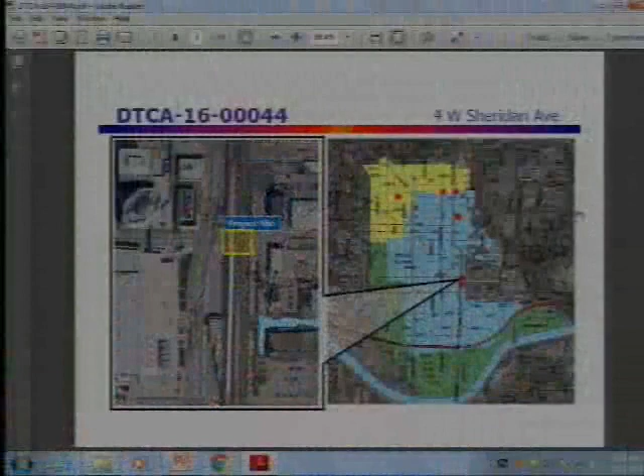We're real excited that we're now including another underpass for the mural project. You might recall the last one we did, on Reno—if you haven't driven that way since it's been finished, please do and enjoy it as you drive through. This is the next project that's come up, and this one is involving the Chickasaw Nation, so we're very excited the projects are expanding.

And we have Native American artists involved in this project. Once again, the underpass as you drive through there is white and very stark. In this particular case, when you get into Bricktown and flip around to look the other direction, there are some old murals up, as you can see in the picture. So this is really going to step up the game and introduce a whole other level of artistic endeavor in that location.

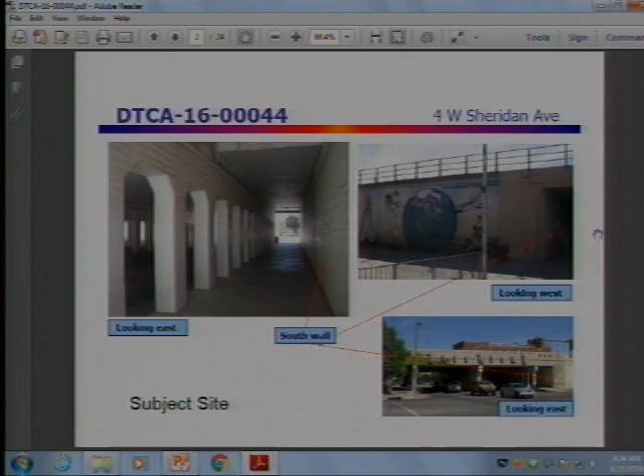On the one side you've got Bricktown, and on the other side you have the downtown area. As I said, one of the projects is the north wall, and one is the south wall. In addition to those walls, it's also all of the columns in front of them—so if you're looking toward the north wall, you'll see the columns that will also be included with that project.

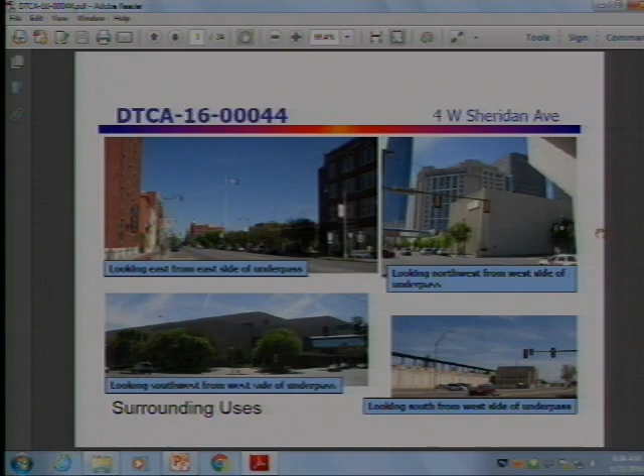So let me flip to... and I know I won't pronounce names correctly, so I'm probably going to let you guys pronounce your names because I do not want to botch them up. So the first design team is Chad and Rhianna—okay good, I did that one correctly. And that one is going on the north wall.

The scale is kind of hard to see. I have my own nickname for this one, which to me is the feathers and the angel people, but that's just how I looked at it—we'll let the artist talk about that. But this was in your packet, showing how it's going on the north wall.

So why don't you all pick up from there, because I don't need to read all of your description—it'll sound better coming from you. Hi, I'm Chad Earls. I'm a member of the Caddo Nation of Oklahoma, and I live at 11105 Spring Hollow Court. I was just going to read the statement I wrote about the piece called Earth and Sky. This would be a collaboration between me and Rhianna Deck, Choctaw Nation of Oklahoma, and we just wanted to make a piece that was fresh, new, and very bold for the city, and tie in with the land.

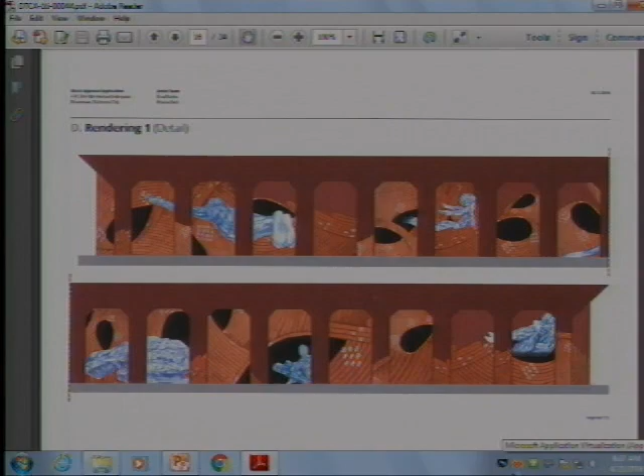The one thing I failed to say is that earlier this week the murals went to the Arts Commission. Thank you so much, it just flew out of my head. They recommended approval of the murals, as well as installation of an identifying marker, which is a new thing they're doing with mural projects. That was part of their recommendation at their meeting, which I think was Monday. You all had that meeting to go to.

Okay, great, anybody have any questions? These are two separate applications, so we need to vote on them. That's great, I think it's beautiful. I love the movement, and it's nice to hear your concept and see your artwork and visualize them together. I think it's really nice. Okay, anyone from the audience want to speak to this at all?

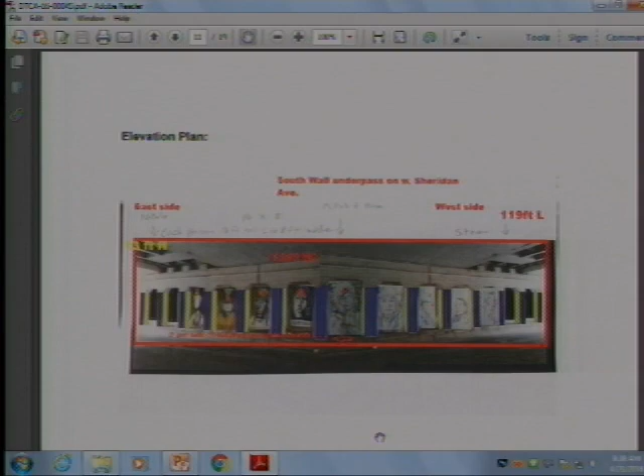Now we have the second application. Do you want them to just address it, or talk about this separately? I don't really need to repeat my original, let me get these larger so they can describe. We have the second design team here - that's you, Nicole? Yes. And this will be on the opposite side of that same underpass. I was fascinated because it's totally different, and I think it's going to work really well as you go through.

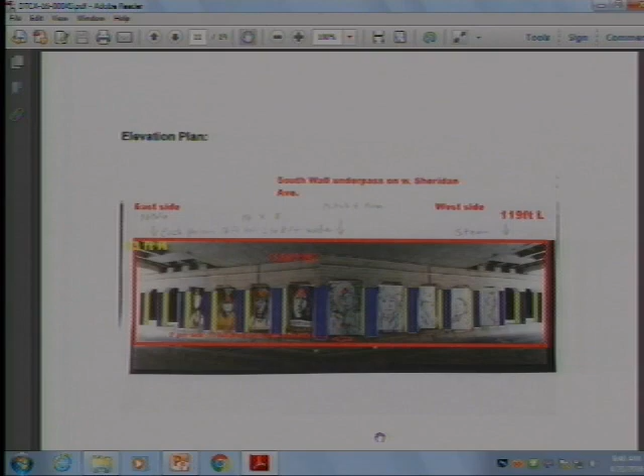Some of us have probably seen some of these pictures before, looking in a book or whatever, and just never made the connection with who it might be. I think that's one of the interesting aspects of this one - the people don't necessarily have names, some of them do, and I like the central collaboration they're doing in the middle, that they're both involved in. But I'll let them tell you about that. Hopefully this is the best view to look at, I'll get it a little bigger. I like the way it looks as you drive through, that each of the faces could be framed as you go through.

So if you guys wanted - my name's Stephen Grounds, I'm from the Navajo Nation and also Euchee Creek and Seminole. Basically for this mural, we decided to give it context with a poem by John Trudell called See the Woman.

We're going to do a collaborative mural in the sense that Nicole's going to reinterpret portraiture in her specific style, and it's all going to be on one side of the mural, and I'll be doing the same thing on the other side of the mural. Then we're going to work towards the middle piece, which would be a Chickasaw elder, and we're both going to do a true collaboration on that middle portrait. The portraits I'll be painting are based on photography from one of my friends in Oklahoma City who's taken photographs of current individuals from different tribes, and it will speak towards the modern day Native in today's society. Whereas Nicole's going to be painting Natives from the past, so the concept will be future generations.

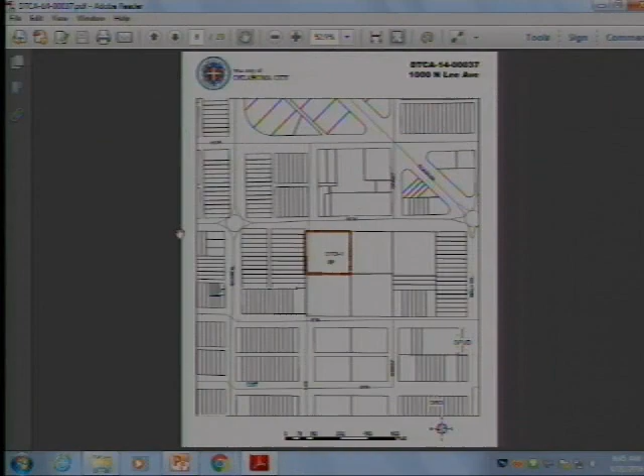The committee saw the new emergency room addition and the accompanying signage sometime in 2014, I think. But since then, they've gone through and changed the location of some signs. They've increased the size of some. There's been a lot of changes, so they're essentially redoing the sign package, and that's what is before you. They will need a variance to relieve the requirement of no signs in the right-of-way, the number of signs, the maximum display area, and the maximum sign height. Staff believes that all of these are appropriate because an emergency room is such a specific use in terms of signage, and understanding where it is, is very important.

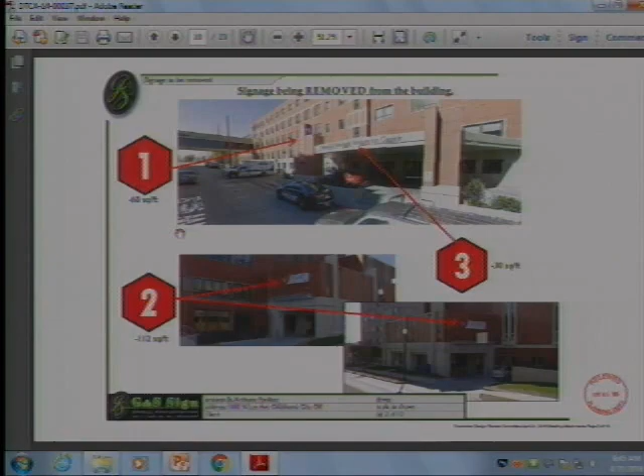Any other questions? I'm here for questions. If anyone has questions, in a real short version, the emergency room is going to move from one side of the block completely to another part of the campus. The buildings are tall. A lot of the signage that we're putting up, we're also taking down about the same square footage at other parts of the building. So it seems like we've got an increase in square footage, but we're also reducing the square footage in other areas. One sign has to be out in the right of way just because the hospital was concerned with somebody pulling into the ambulance entrance instead of the emergency entrance, and they were afraid they may get hung up for a brief period of time, which could be a few seconds, but could make a big difference when you're looking for emergency.

Okay. Any questions from the committee? Any comments from the audience? With that, do we have a motion?

I move to approve the application on the basis that the project complies with the regulations and guidelines of the Downtown Design District Zoning Ordinance as referenced in Section C and D of the staff report. Okay, so that's a Bates, Ainsworth motion. All in favor? Aye. Aye. Any opposed? That motion passes.

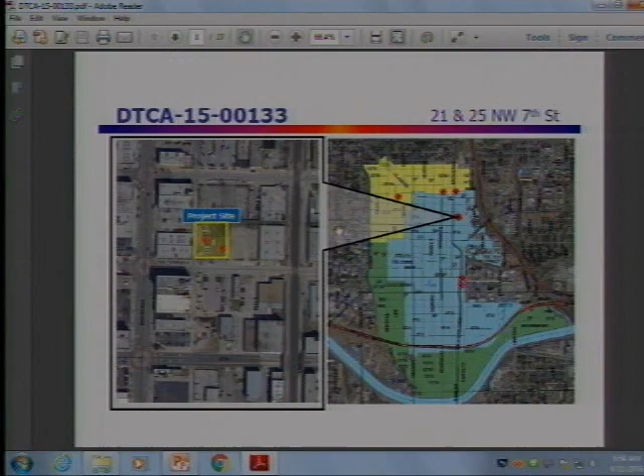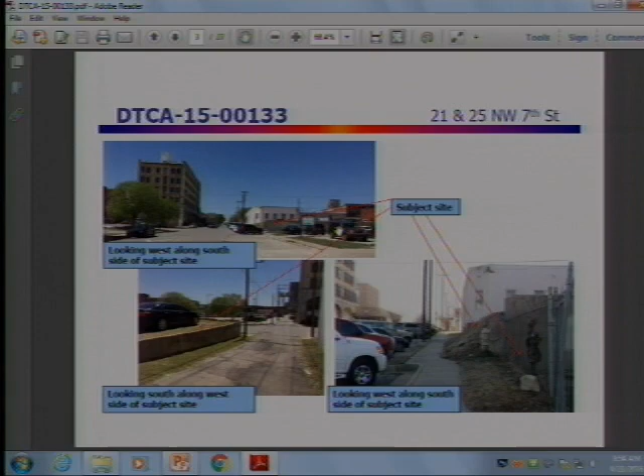Next item is item 6C, 21 and 25 Northwest 7th Street. Lots of things happening in that area, right? Yes, the committee saw a presentation on this project a couple of months ago. It's a food truck court and associated structures. The main comment at that presentation was whether the project could better address the street frontage in terms of window and door access, and the design in front of you now has addressed that issue in a much more significant way.

Can I ask a question? Is this under the purview of Automobile Alley? We send all Automobile Alley applications to a representative of the Automobile Alley Committee. The committee doesn't convene for every project. I just was wondering if this was heard by that committee. It was not heard by the committee. Okay.

Dave Ledbetter, 2612 Drake Stone. I'm here on behalf of the developer, Nick Faulkner. Does anyone have any questions?

Would you walk us through the elevations so that we can understand them completely? Because they are a little difficult. Starting with the rendering on the south, the entries on the southeast corner. Okay, enter the structure for that particular point. The entry to the actual first floor is in the entry module vestibule located directly inside that. And beyond that, there is a chairlift, and it says stairs that goes up to the main upper level, which is the same level as the majority of the alley.

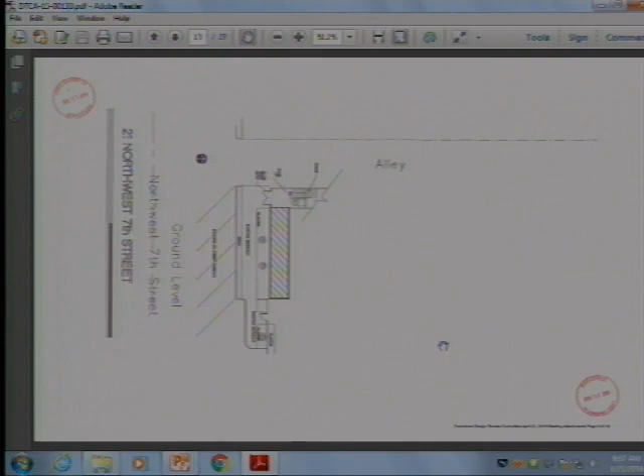Okay, so on level 1, on the floor plan, is that one of the pods, one of the shipping containers? Yes. And it will be used—because on the floor plan, it's hatched differently than the... let's see what we have here. Right, that's just to give the location of the actual space on level 1, correct. And it will be used? Correct. So to place that shipping container there, how are you installing that?

We're going to have to do substantial site work, engineering. We're going to have to excavate and build retaining walls to the back. Okay.

So in the same vein as Corey's question, what do you see inside those windows? I'm sorry? You've added the windows on the street? Correct. On the first level, basically you see into the space, it's wide open. And you said you were planning retail? That's our hope and intent, as a possibility, but we don't really know what we're particularly seeing yet.

So your plans actually show—maybe the plans are at a different level. Plans actually show windows across that entire frontage, except for kind of 2. The windows on the entire... so the windows on this plan are actually showing the second level? Correct.

And then the concrete retaining walls that are on both the east and west side of the site, are these the existing walls being maintained, or are these new walls? Our belief is we're probably going to have to replace those. We're securing engineering presently to find out what the existing structure can support. Okay, so most likely those existing walls are going to come down. Yes. But you're planning to build a wall exactly like what's there? Yes.

On the actual courtyard itself, where you're proposing this white picket fence, what were your thoughts on that? I noticed somewhere else you had the metal mesh fencing, but on that prominent facade, it looks like you've chosen to switch to a wood picket fence, and I just wanted to hear your thoughts on that. Oh, on the lower south elevation.

That was basically a cost factor.

How long do you think this is going to be used? Is it something you're proposing as temporary infill, or do you see it long-term? It would be nice for it to go forever. We have a 15-year lease on one piece of property. The other is a shorter term.

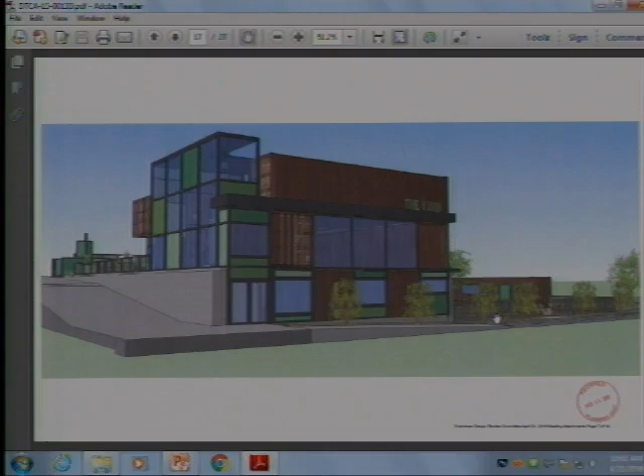My comment with the wood picket fence might just be about the durability of that fence in this particular location, and whether there's an alternative, similar product that might give a similar look but be more durable. The recent change in the design guidelines limits you to a type of fence - I think it's a 1-inch picket with 2.5 inch spacing - and basically it was just a cost factor.

I agree on the materiality of the fence. It seems somewhat out of context relative to the rest of the project. We'd be willing to substitute a metal rail picket fence if desired.

And do you have a location for the mechanical equipment? What's servicing this building, and where is that located? Third floor, the center module.

Go up, keep going to the left. Back, sorry. That general area in there. And of course, a lot of this can be mini-split.

So your mechanical equipment is within one of the shipping containers? Correct. Are there any air intakes or louvers - how does that mechanical equipment work? There will be some air intakes after we get a mechanical. I've got a project down at the Medici building - everything, we're doing a split system. It's all located within the structure.

And where would those be located within this project? Vents, probably to the north. Okay, it's not to be visible from the public right-of-ways.

So let me ask this question again. What were you planning to do inside the space on the first floor? Hopefully retail or mercantile. I have another project like this where - how deep is that? Excuse me, they're 8 feet. So it's going to be really limited - I have a barber shop that's moving into an 8 by 20. Well, believe it or not...

That'd be great. Why didn't you just utilize the entire first floor? Because it looks like you've got a lot of space that you're excavating anyway. Excuse me, on the first floor, basically we're excavating the existing berm back from the property line 8 feet to engage the street. Original proposal was to start the structure on the upper level only.

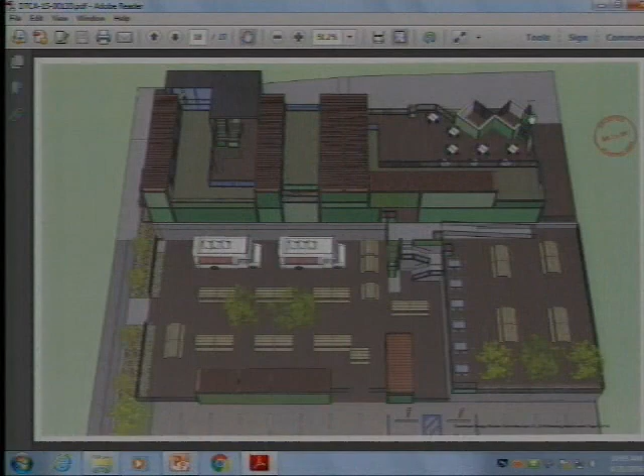I don't know if this is really a design comment, but it's more of a functional comment. You're showing tables and chairs behind the dumpsters. I'm wondering how that's going to work, sitting next to the dumpsters, and if that's really what's planned for that location as outdoor seating or outdoor dining. Maybe that's not what's planned, that's just what's shown. I don't know that sitting it next to the dumpsters is the best location for that.

You're talking about smells and stuff like that. Yeah, definitely. Especially if this is a food truck, there's going to be waste, large quantities, and it will not be pleasant.

I understand your comments. I do several hospitality projects, and I have several locations that are quite similar that have dumpster and trash locations adjacent to outdoor seating. I'd also plan to mitigate it by trying to do a solar-powered ventilation system that actually draws the air up. I've done that at a location in Virginia, so that's something I'm thinking about and trying to address in the design.

Is that what this thing is, actually, on the side of the dumpster, this vertical element? That's actually an outdoor fireplace. Oh, that's the fireplace.

Are there other efforts to use PVs and solar energy on this project? I'm sorry, did I hear you right, that you were talking about just the trash location by itself? Basically, you create a ventilation that draws the air up vertically and away from the project. Okay, so just in that location? Just that location, yes.

And then on the east lot that has the outdoor seating and the food trucks, is that whole ground area you're proposing crushed rock? Yes. Is there anything taken into place to maintain that, to stabilize it? Yes. Could you elaborate on what that is? There's a project in Dallas, the Trinity Groves, which is across from the bridge. They had entire parking lots of stabilized crushed granite.

So what are you doing here? Using the same method.

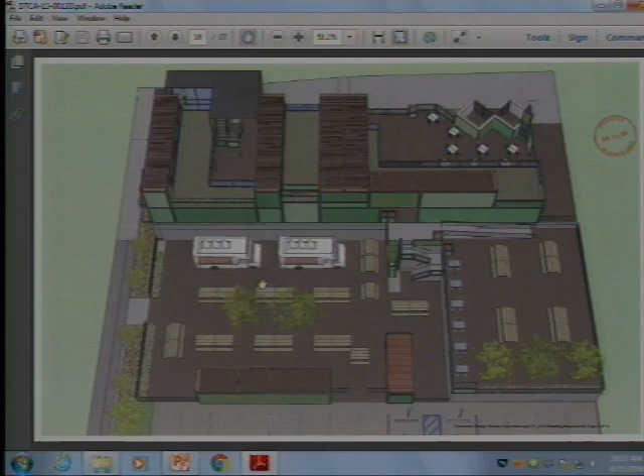David, you're planning on a concrete border? Concrete border, yes. I think this is some of the detail we're referring to, that what's been presented begs a lot of questions about how this is actually going to get executed. One of the comments we've gotten when we've seen other container projects is that it's a lot more expensive than you think it is. Have you been able to get estimates on this, and do you feel like this is really affordable? We feel comfortable with our people that we're using, yes. We feel comfortable with the cost estimates on what we've achieved, yes.

Okay, evidently cutting, like the entire side out of a container, or large holes in the container, can make the structural stability of it not. If you're referring to the second level, basically I'm spanning over it and creating glass in the space. I'm actually talking about the first level. And creating those holes, you're creating that size specifically for a container.

I think there's some sustainability things that I would really like to know you've explored, because I think this is kind of an unusual project. It is fun, but I think there's some things I would like to see as well, as far as making sure we're not going to see this over and over again, making changes and changes, which we have seen with projects like that.

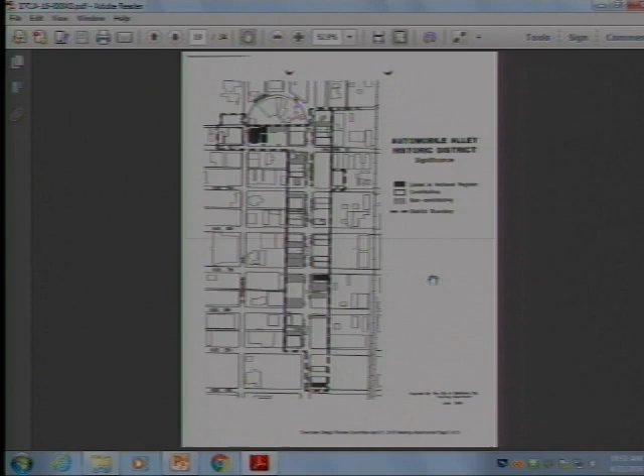I will. This is a proposed new four-story multi-use building at the southeast corner of Broadway Avenue and 11th, literally right at the edge of the north edge of Automobile Alley. The staff report is quite long and detailed—there are a lot of decision points about the character of the district, to what extent building elements need to be compatible, what is compatible, and what density is desired.

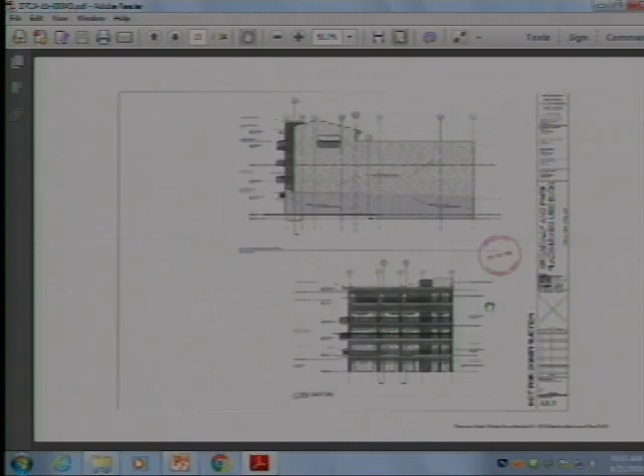There's one of the streetcar stops going to be just north of this, and that stop could potentially both generate traffic and need traffic to keep it active. But there's also consideration of the scale of adjacent buildings. We've outlined all of those in the report, and I'll let the applicant take it from there.

Thank you to the committee. I'm Haven Mankin, Senior Associate at GSB Architects. I have with me Scott Parker, who's the project architect, project designer and project manager. Safdar Muhammad is in the audience here, as is Chad Elmore, our leasing and real estate specialist for the project.

Laura, would I be able to see the slides—those that were in our presentation materials? Yes, ma'am. Okay.

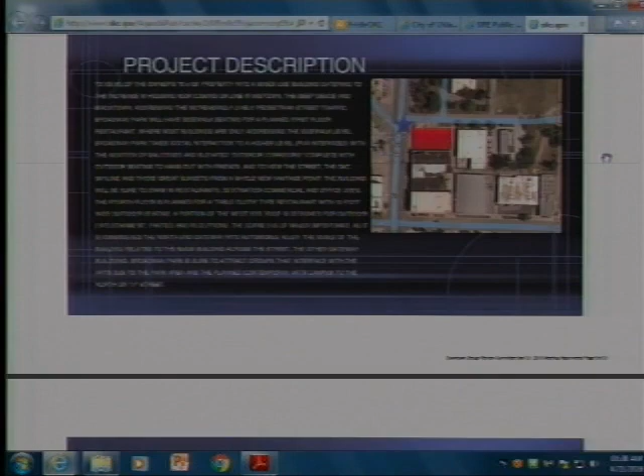But we're not building a historical building either. What we are building is a building that is becoming, I think, a gateway on the north end of Automobile Alley. In scale, it's similar to the Buick building across the street. It's a transitional building, again not trying to build a historical building. We think that's wrong. But the juxtaposition of new buildings and old buildings together really enliven and enrich a community more than if we were to sit here and try to build a box that looked like a 1920s warehouse building.

So the setting, as you can see, this slide leading into Automobile Alley just gives you a sense of scale. We have a really nice opportunity to the north with the park and upcoming arts campus there. But this building, we're addressing the street. All the buildings on Automobile Alley address the street to one degree or another, mostly on the sidewalk.

And we've addressed the streetscape, sidewalk zones, storefront zones, all the various zones on this first level. We've addressed those zones that are in the downtown design and development framework drawings.

But we think the building should go farther. A lot of people go into a building, occupy it, do whatever their function is, come out, get in their car, drive off. That is not integrating with the city, not integrating with the community and the people that live there. So our project is taking that a step further.

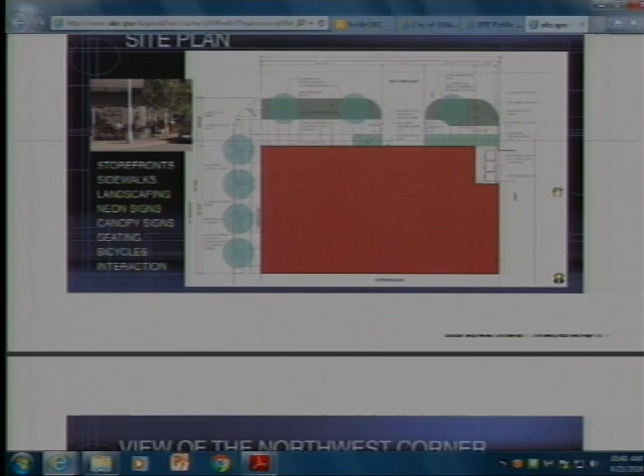In the upper right corner are the dumpsters. They have gates on them, sight-proof gates, metal with a metal panel or screen over the metal framework of the gate. We can bring that to you later if you'd like to see detail, but the dumpsters open out to the alley. We've talked to the trash companies that pick up in the downtown area and worked out details with them. Also in the lower right corner is where our transformer is, and if you look closely you can see a pair of doors there. So we've worked with utility companies on the project.

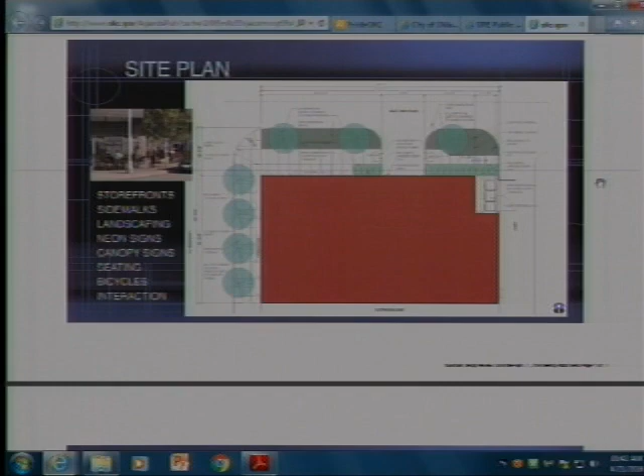The project is four stories with a rooftop terrace. The rooftop terrace is about 50% covered and 50% open. We have two stairs that go up to the roof as well as the elevator, and there's actually two restrooms up there. The purpose of the rooftop terrace is for receptions, parties, just get-togethers, maybe a wedding reception. And so it's also, we have walkways that are on the outside of the building.

It's basically turning our circulation that would be inside the building outside, so that we can actually integrate with the city at multiple levels.

We have the opportunity here to really engage the Oklahoma City skyline, the sunsets to the west, even the street at different vantage points. If you're walking along the sidewalk, the cars are parked right next to you, and you have those sort of conflicts available. But to see the street, to see a parade, a marathon running event, the Christmas lights in December from multiple levels, to actually have a party on those upper levels and balconies would be fantastic, as well as the rooftop terraces I mentioned.

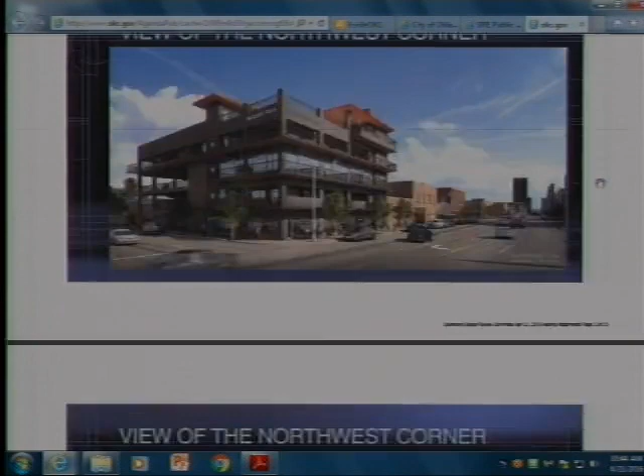We actually have a person with a spa who wants to lease a whole floor already. We haven't really started leasing, of course, but to have a person that wants to take all of a second or third floor right now, and they love the building, is pretty incredible.

On the 4th floor, we're expecting another restaurant, an upscale type of restaurant, which we called a tablecloth type restaurant, with wonderful views of the Oklahoma west sunsets, and to the north and the park, and those kinds of views.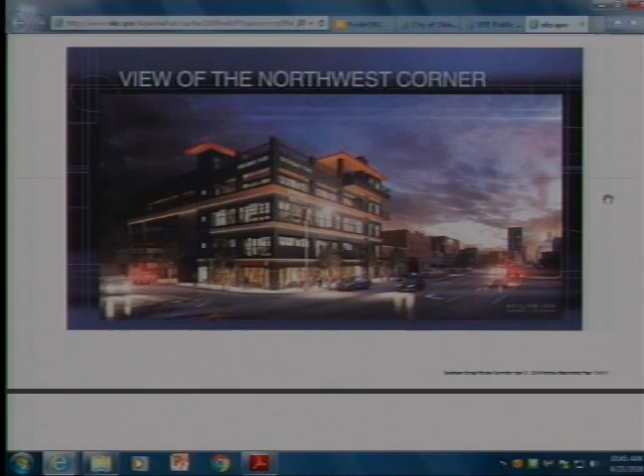On the east half of the 4th floor, depending on how big the restaurant is, we have office spaces, and we expect a lot of the upper levels to be office-type use, maybe art agencies that want to go in with a new art complex to the north, that sort of thing. But we feel like the window shoppers are going to be on the first floor, while there will be destination commercial on the second and third floors. People will want to go for a certain service that they don't have right now downtown.

The Automobile Alley people looked at the project. We got feedback from city planning. We've met with city planning several times. We've met with and talked to traffic and plan review several times. So we're trying our best to address everybody's concerns.

Automobile Alley had a concern about the exterior materials, which at one time were granite and fiber cement. It's now brick. So those materials, granite and fiber cement, were changed to brick. We are trying to address the concerns that people might have about this project.

I guess that's about all. I think we had the slides of the floor plans, but you may not care to look at that sort of detail. But in light of the previous case that you all just finished talking about, we do have all of our mechanical engineering figured out, plumbing, and all that sort of thing. So we have engineers working. We're probably 65% through working drawings, so we're pretty far down the pike.

We can address any questions. These other images are part of the working model. It's changed quite a bit from there, but we are modeling the building fully in 3D.

Suggestion for moving ahead with this? Staff's recommendation was to continue it because we had a couple more questions.

Well, one, we recommended approval of the demolition and the site elements. Staff did not feel that the exterior balconies were appropriate, in that there is no other precedent in the district for balconies. One could say that, and part of what the applicant is trying to say is that they're trying to establish a new precedent in a new part of the district, and that may be a valid point of view, but I wasn't sold on their appropriateness.

On the drafted CAD elevations that came with the latest round, I couldn't tell if they didn't match the rendering, or the elevation seemed to show a steeper, more prominent slope on the roof, and I couldn't tell if that was on purpose or if it was supposed to be just this real low slope thing. It's 312 in both. No changes have been made on that.

Okay, but I wasn't sure a sloped metal roof was in character of the district. Again, part of the argument is that this is setting a new precedent. Yeah, so those were several items that staff didn't feel comfortable recommending approval without seeing a revised

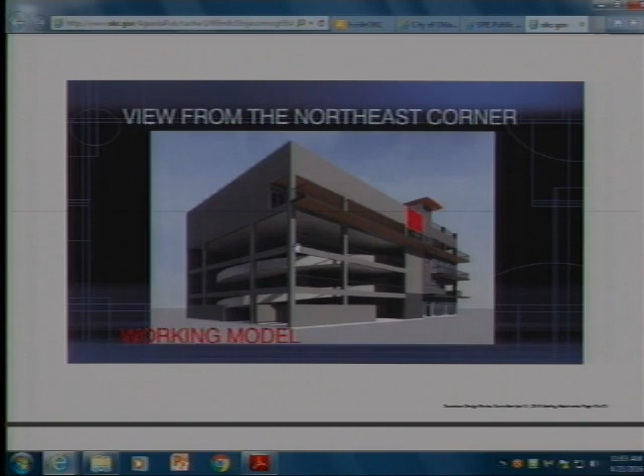I think it's maybe the next one - well, it's in the packet, I saw it, I just pulled it up online on my phone. That exterior view right there, even the one that's a little bit more highly evolved, that's clearly a parking garage, that's not a building. If it were completely covered with brick, not just concrete coating in the back, but even the north side enclosed with punch-outs like Mr. Elliott suggested, that would at least be more consistent with the character of the neighborhood.

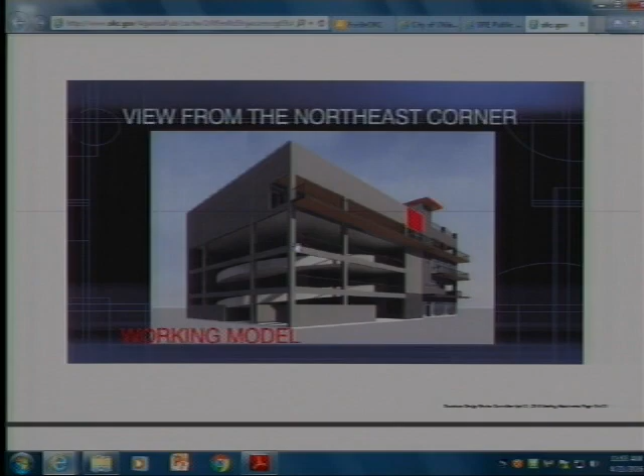That's what people are going to see, that's going to be your gateway to Automobile Alley - then your gateway to Automobile Alley is a parking garage. And I just met with Chris Keesee from the Kirkpatrick Foundation, who's put a tremendous amount of money into the Oklahoma Contemporary, and they're out raising money for this. I don't think it's empowering to people who are building the long-term design look of this area, with homage to the beauty of the past, to see that every time they're trying to raise the millions of dollars to complete the Oklahoma Contemporary.

For myself, I just think there would be a way for them to execute their development, which is very welcome and appreciated, in a way that is consistent with the neighborhood, that doesn't detract from the rest of us who have invested money there and want to enjoy it. Thank you.

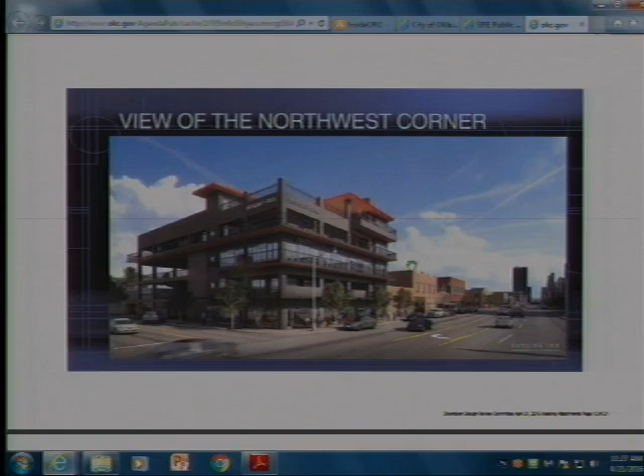I really think we're all happy to see a building of this importance on that corner, and I applaud you for wanting to do this project. I think it's a huge opportunity to be an iconic building like the other iconic buildings that are in the area.

It really has such a special character. I see it as definitely a gateway, an important gateway into that district. I see the Automobile Alley district, as I do many districts, as discrete unto themselves. I don't see the necessity, or even the value, of a transition. I think it's interesting to go from a discrete district to another type of use, which that museum will be, a very important, iconic building in and of itself.

So I would like to see this building be more integrated into, and have more reference to, the Automobile Alley look and feel, the aesthetic of Automobile Alley, which is softer, maybe for lack of a better word, and just a more organic look. I do agree with Nicole and Corey regarding the pitched roof and the standing seam metal. I don't mind the color so much. I think the reference to the color, and Marland Oil, and that symbolism, could be a very interesting opportunity to bring back the whole automobile and energy aspect as an entrance to that area.